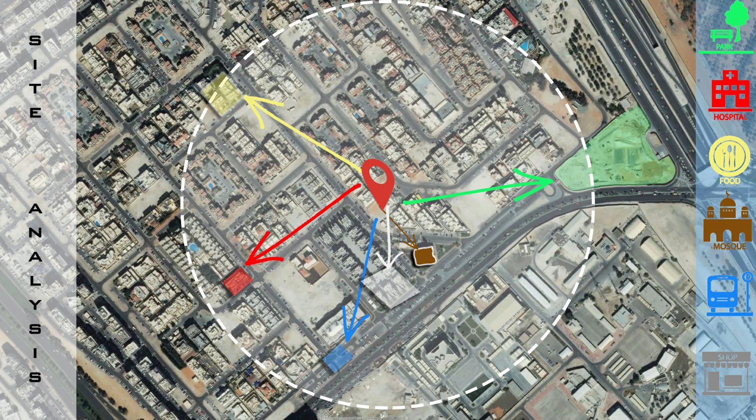Our project is located in Abu Dhabi. The site is in Al Nahyan Camp, which is surrounded by multiple services: park, hospital, restaurant, mosque, and is accessible to public transportation through Delma Street within a walkable distance of 500 meters. The site is accessible by car through the main road and minor road, and by pedestrian routes.

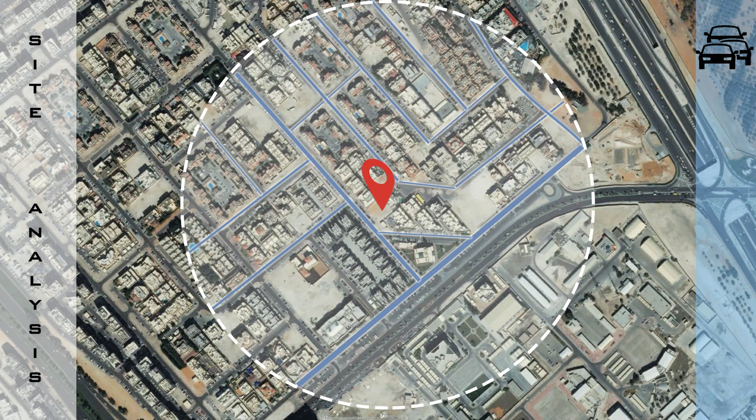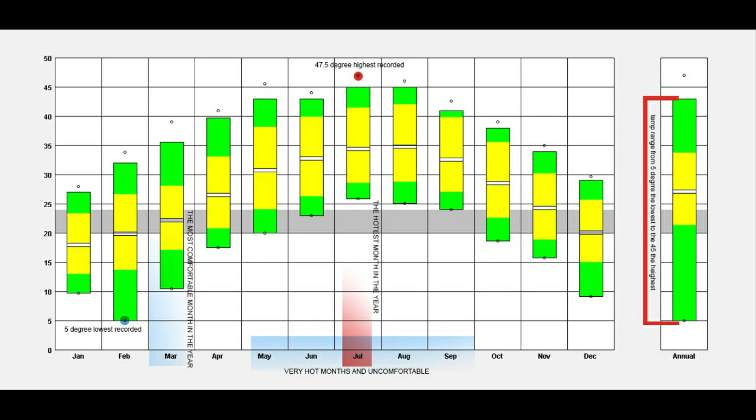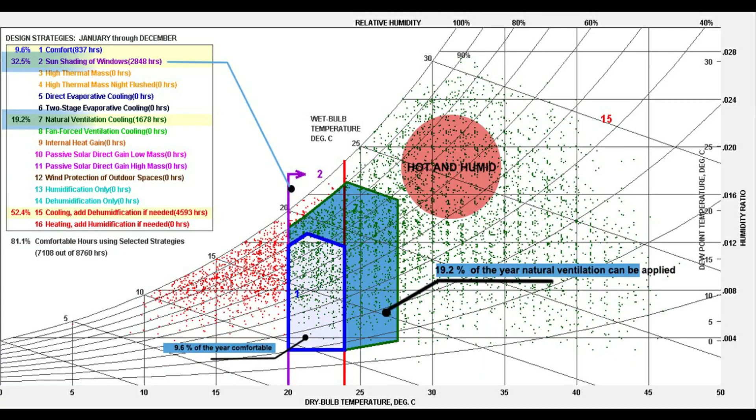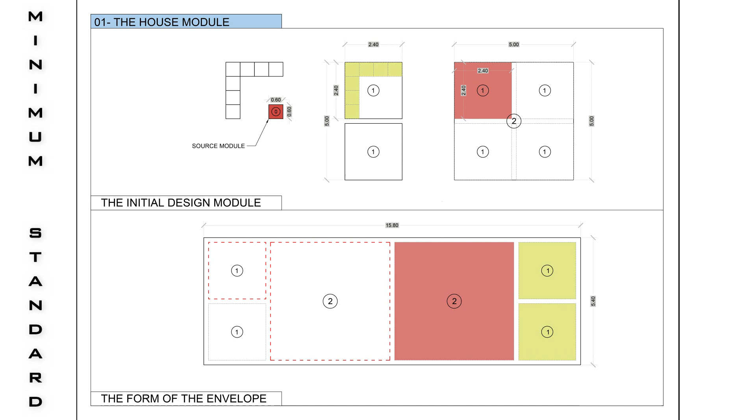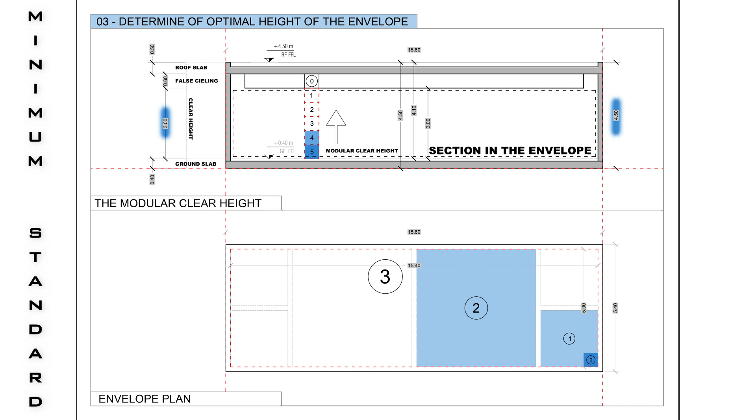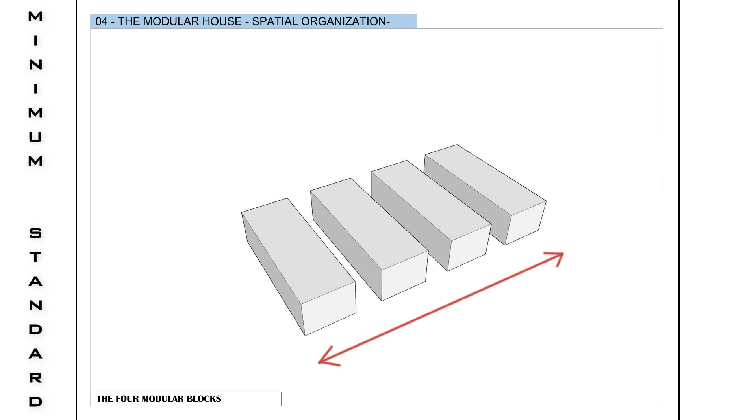The module of the house has been generated from a very basic module, 60 by 60 cm, and by combining these modules we got the form and size of the house modular envelope. We determine the optimal height of the envelope using the same source module. So this is the final size for the box envelope, which is 5.4 by 15.8 by 4.5 meters high. Then we got modular boxes to be arranged within the given plot.

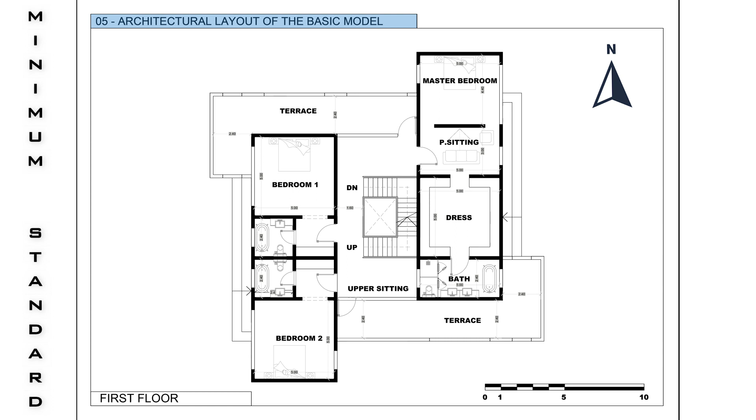The final architectural plans for the basic model. The modular blocks will be shaped using precast modular walls.

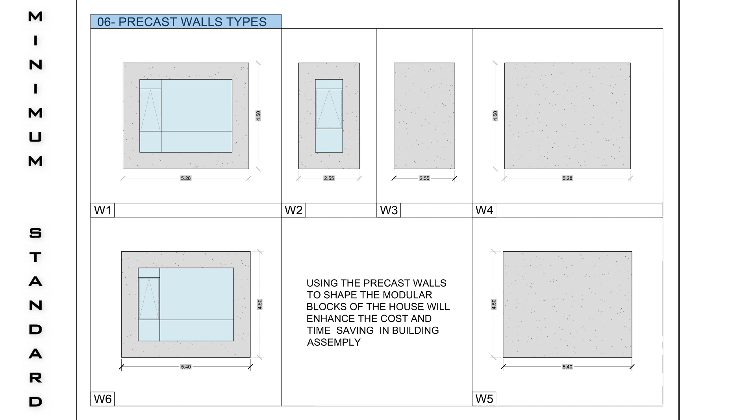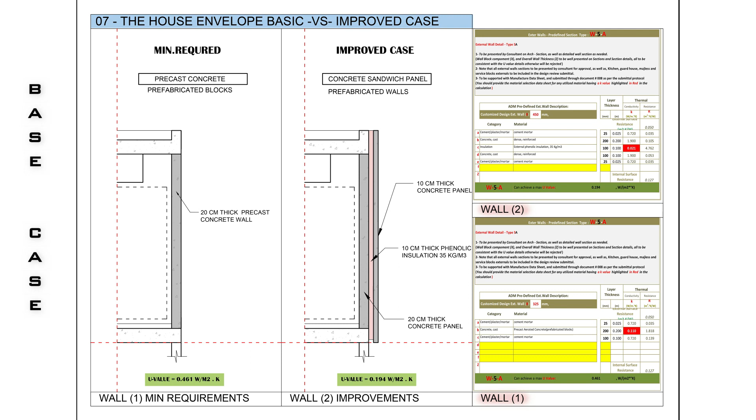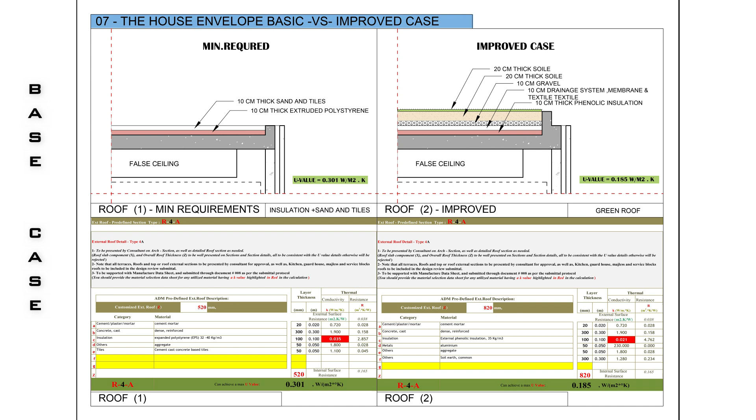For the improved envelope, a concrete sandwich panel with 10 cm phenolic insulation will improve the transmittance value to 0.19 watt per square meter Kelvin as per the Estidama calculator. And a green roof of 20 cm soil for vegetation has improved the transmittance value to 0.185 watt per square meter Kelvin.

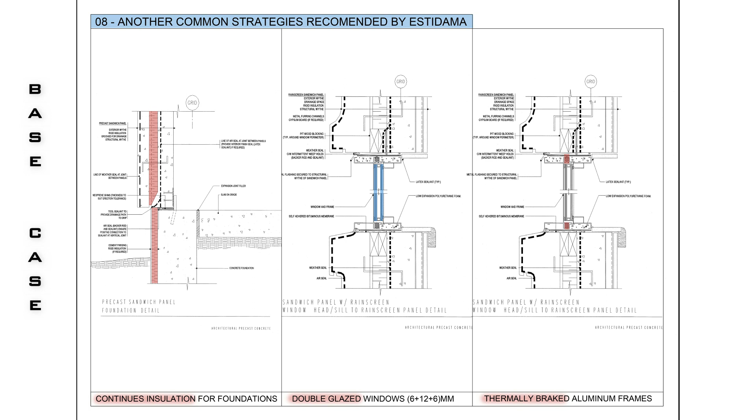Double glazed windows with thermally broken aluminum frames will be applied to the envelope. The passive design strategy of cross ventilation is applicable, and the wind tower with operable windows allows us to get the benefit of the stack effect.

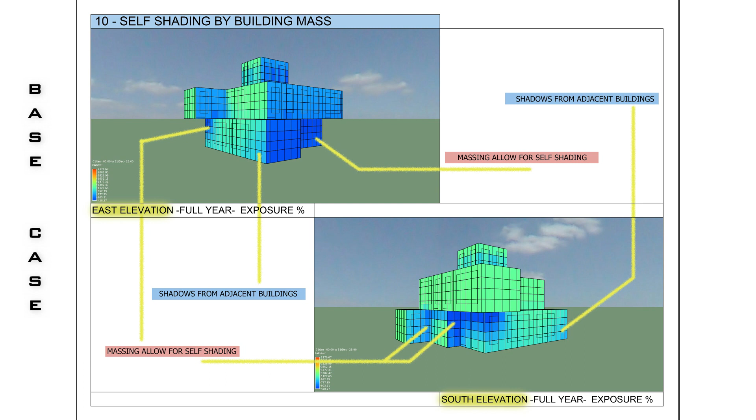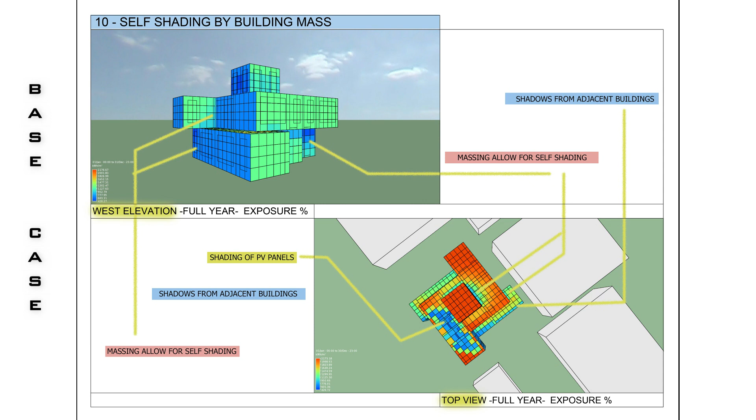Determine the optimal orientation. After we relocated the building in 8 different orientations, we selected orientation number 5, not only because it has the lower energy consumption, but also because it has a self-shaded elevation toward the southwest, and because of its alignment to the adjacent road.

Determine the study case scenarios. We selected for the city of Abu Dhabi 30th of January and 30th of July, the dates for minimum and maximum temperature, and 30th of April for the average scenario, and each specified date will be studied at 3 different times: 9 morning, 12 midday, and 4 afternoon. So in total 9 different scenarios to be analyzed.

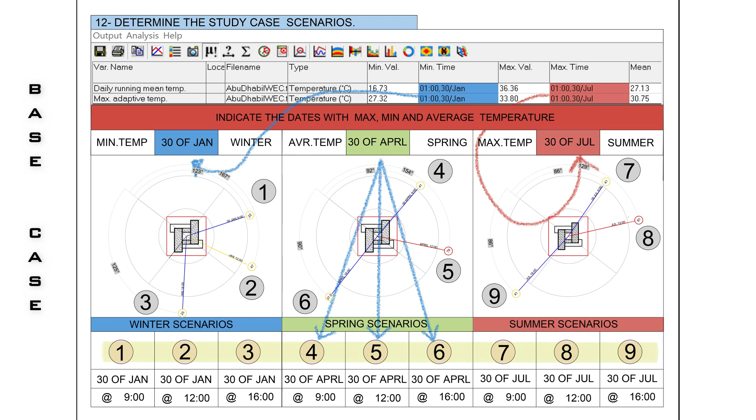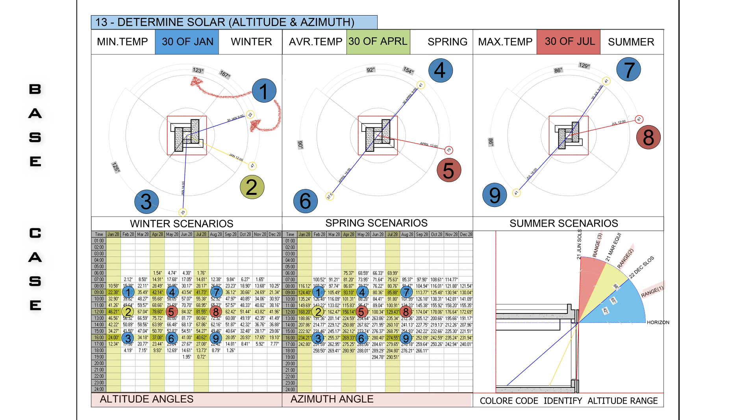Determine solar altitude and azimuth. After getting the data of the sun altitude and azimuth from the IES, we highlighted the related angles and applied them for each scenario as per its correct position.

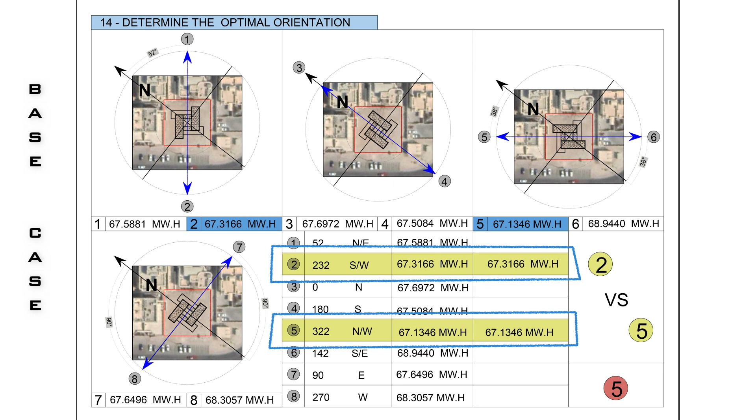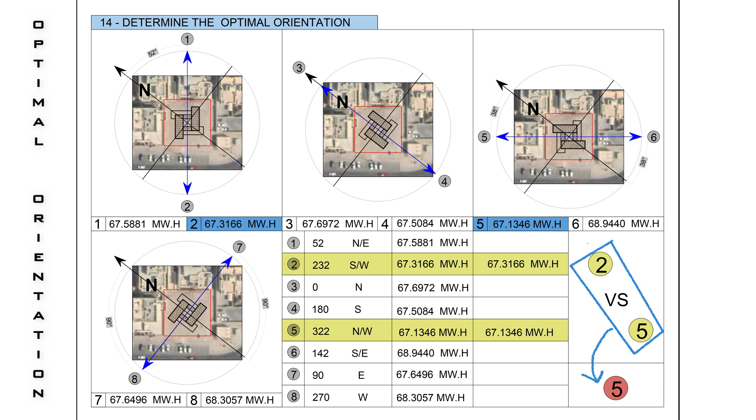Determine the optimal orientation. After we relocated the house in 8 different orientations and calculated the predicted energy consumption for each direction, we highlighted 2 preferable orientations because of their alignment to the road and they have the lowest energy consumption. Then we selected orientation number 5, not only because it has the lower energy consumption, but also it has a self-shaded elevation toward the southwest instead of the exposed one for orientation number 2.

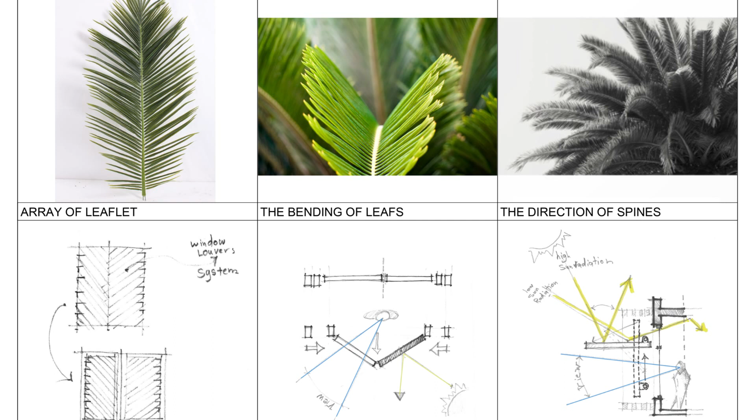Kinetic system concept. The kinetic system is designed to be an automated system with variable modes, which can be controlled, programmed, and optimized through a smart home system controller. Mode number 1, the sleeping mode, which is totally closed. Mode number 2, east-west mode, can stop the solar radiation but still allow the view and diffuse light to enter the house. Mode number 3, full view mode, which allows for full view and diffuse light to enter the house.

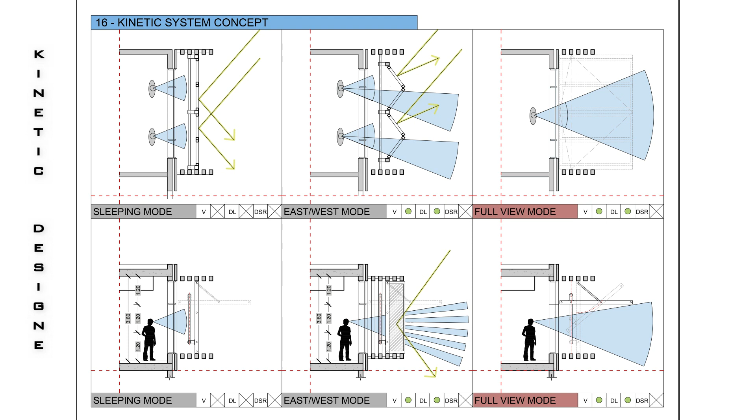Applying the kinetic mode. In order to apply the correct kinetic mode in the correct location and time, we use 3 different diagrams, A, B, and C, which represent the sun locations for 9 a.m., 12 midday, and 4 p.m.

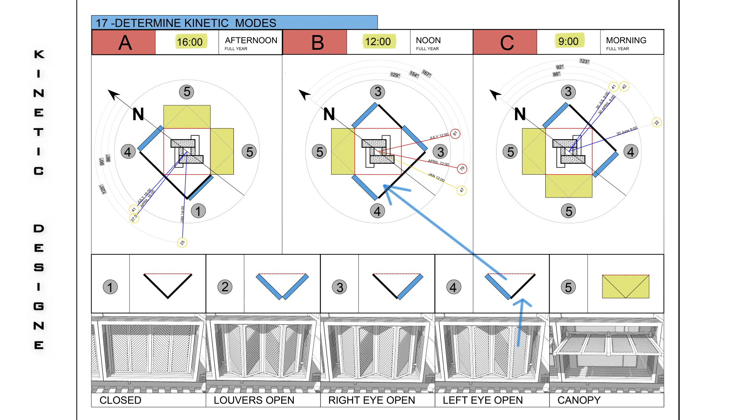And we gave a symbol for each kinetic mode to apply the suitable mode in its suitable location. After this arrangement was done, we got 3 different models to be tested in their related scenarios. The motion of the kinetic system and its modes.

First, sleeping mode. It's blocking the light from going inside, also blocking the artificial light at night from escaping to outside, so reducing the light pollution, and it's used for sleeping time and during the day when there is no occupancy in the space.

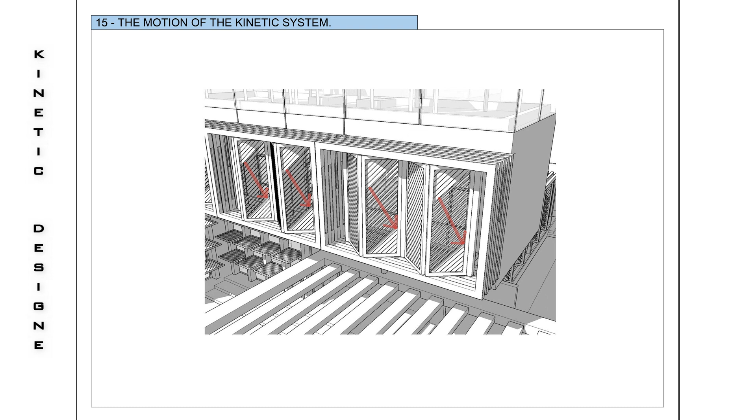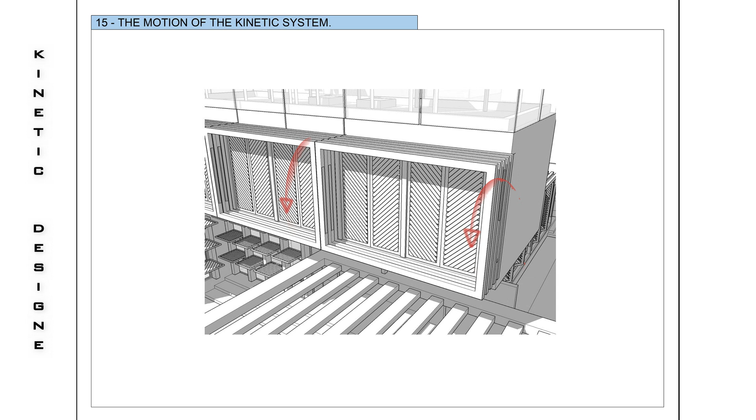Right-left eye mode. It allows one side of the frames to face the solar radiation while the other side will remain protected, so it opens its eye by rotated louvers to allow view for occupants and more daylight to enter the space. The canopy mode. It's suitable when the solar altitude is high or in case of the absence of direct sun radiation, to allow full view and maximize the daylight for the space.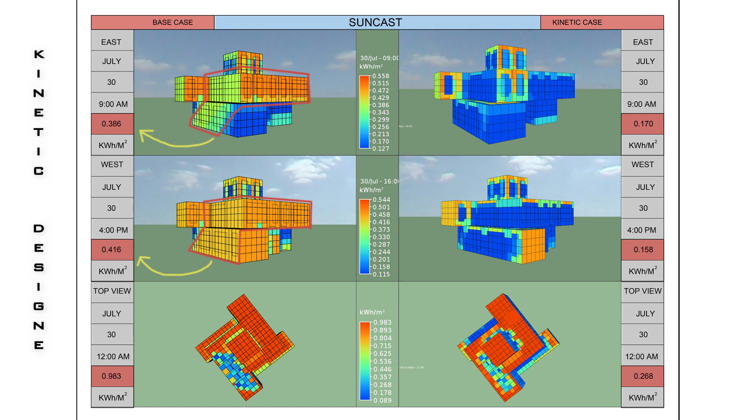Kinetic system analysis. Kinetic case compared to the base case in terms of sun cast. Kinetic case compared with the base case in terms of temperature and solar gain. The kinetic case in January shows an average reduction of 7.5 degrees Celsius, and the temperature achieved in all January scenarios was within the comfort range, so no air conditioning is required.

For the 30th of April, an average reduction of 6 degrees Celsius, but still the air conditioning is required, as the temperature is still above the comfort range. And in July, the average reduction was 5.5 degrees Celsius, and the air conditioning is still required.

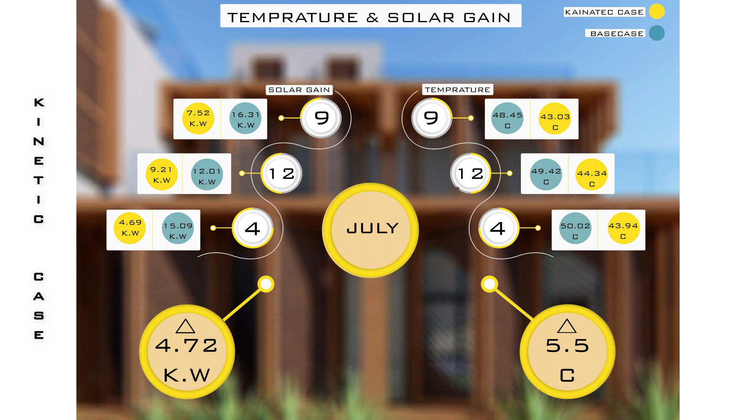In terms of energy consumption, on the 30th of January, an average reduction of 4.42 kilowatt in space cooling energy, and 3.14 kilowatt on the 30th of April, and 2.75 kilowatt on the 30th of July.

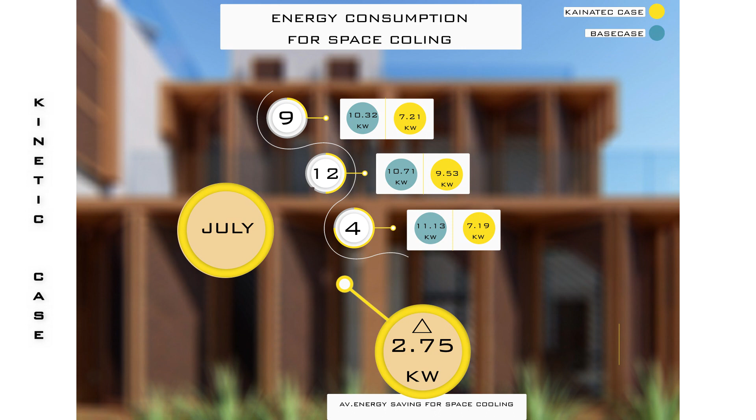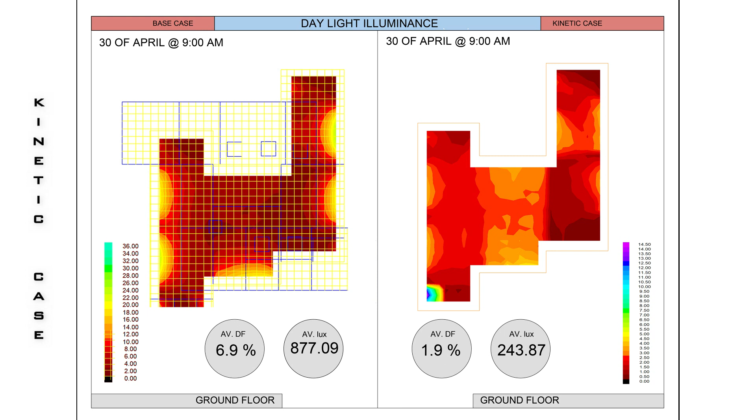In terms of daylight illuminance, this comparison on the 30th of April at 9 o'clock shows that the average lux levels in the ground floor have been reduced from 877 lux to 243 lux with a daylight factor of 1.9, which is considered within the comfortable range for casual seeing and easy visual tasks. And in the first floor, the average lux amount reduced from 1000 lux to 240 lux.

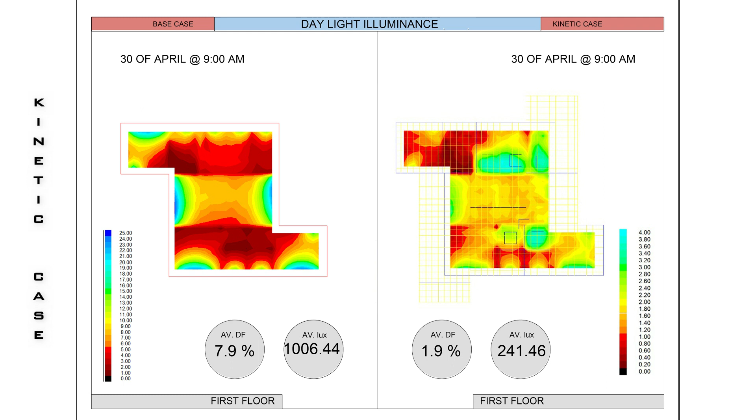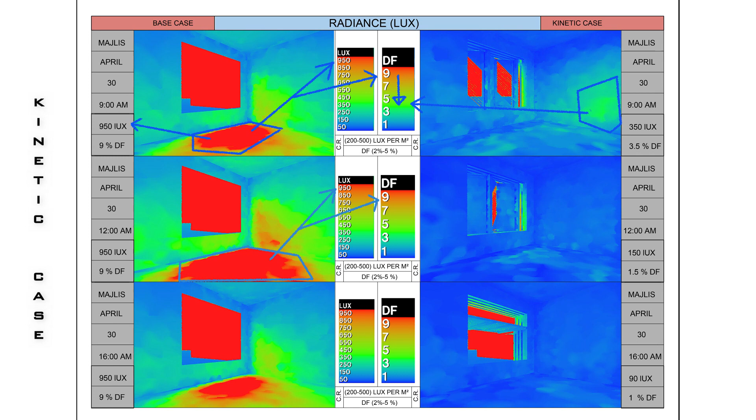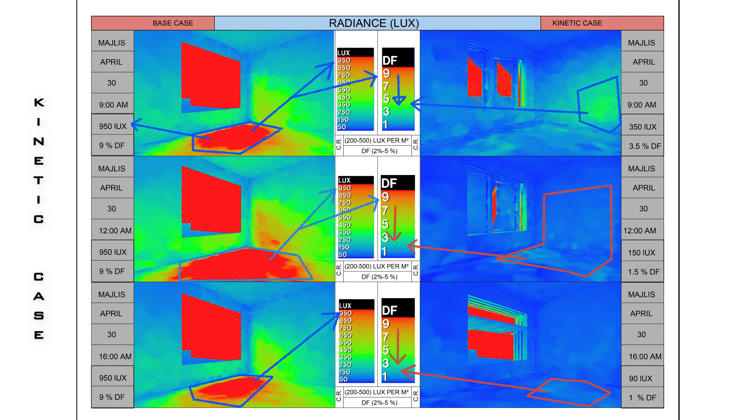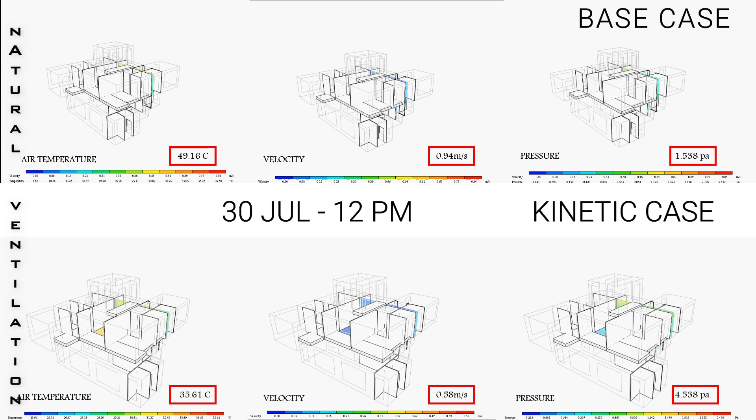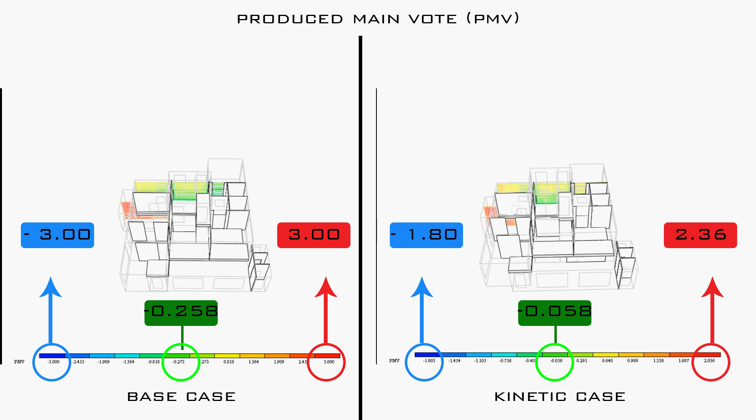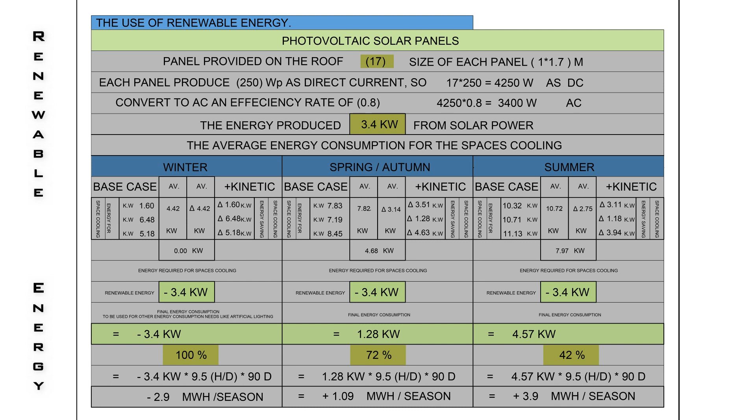The use of renewable energy. The project has 17 photovoltaic panels on the roof, with total energy production of 3.4 kilowatts, used for the project's average cooling energy consumption. But in winter the cooling energy consumption is zero, so the solar power could be used for artificial lighting. In spring and autumn, the solar energy will stand for 72% of cooling energy consumption, and for summer, it will stand for 42% of the cooling energy consumption.

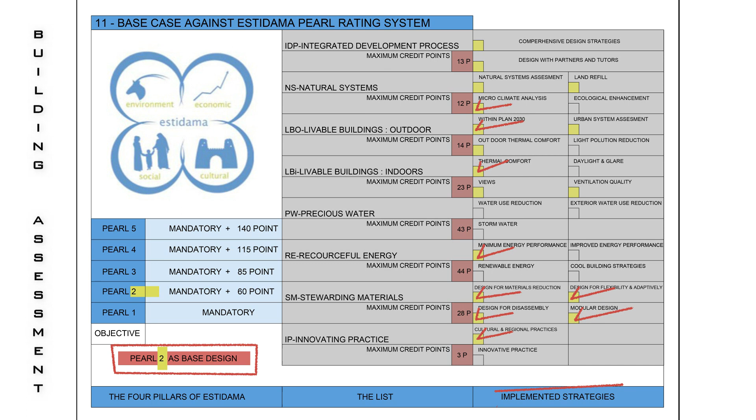Base case against the Estidama Pearl Rating System. One of the Estidama key initiatives is the Pearl Rating System, which aims to address the sustainability of a given development. The Pearl Rating System has 5 levels from Pearl 1 to 5, as per the points the project can obtain from 8 different categories. In this particular project, the objective was to achieve Pearl 2 for the base case design. The Pearl rating of the kinetic case. The objective is to achieve Pearl 4 for the kinetic design case, by further improvements in different categories.